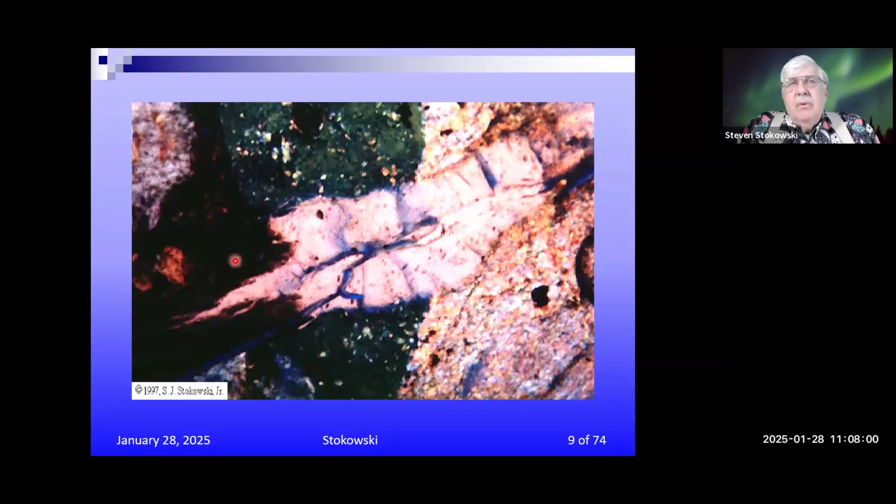But in this case, this rock on the right side here, this is about 1.2 millimeters across, and this metasiltstone here has reacted. It's expelled silica gel, which has gone into the cement paste and reacted here with other components of the concrete on the left. This is what you typically see in thin section work in concrete.

And to be able to distinguish the cracks readily from the infills of the cracks, all of which are various shades of gray, you need to change the epoxy so that the epoxy is blue dyed, and you fill the voids. Now I typically have two different scales that I'm taking photomicrographs in, and these are old photomicrographs before I had a scale bar that you could put in there. But this particular one is about 3.4 millimeters across, and the close-ups are about 1.4,

1.2. And here, this aggregate particle has expanded and cracked, and there's silica gel that's come out of it, and continued expansion, which left void space in it. It actually shot silica gel out into an air void in the concrete and completely filled that void, and then continued to expand afterwards, reopening this crack, which was then filled with epoxy so that we could get a good thin section.

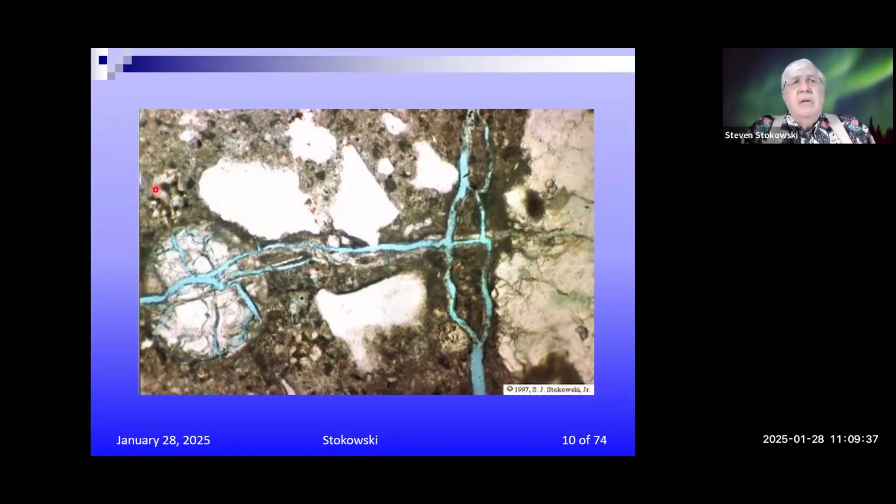For those who don't know, these are cement particles right here, and they're composed primarily of two minerals: this, which is belite, which is C2S, and ferrite, which is an iron aluminum silicate in here. There's also another mineral which imparts most of the strength in concrete.

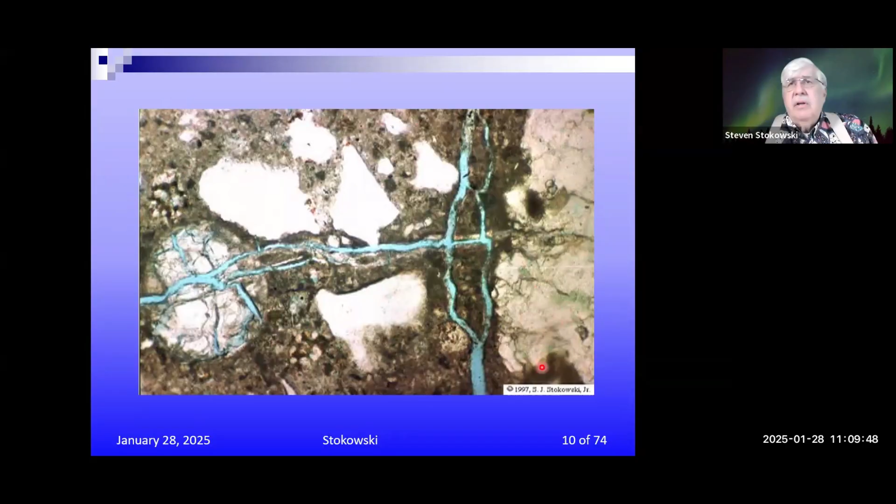Now, in concrete in New England, you have ASR that occurs. It doesn't occur immediately, which is distinctive from other parts of the country. You generally have to wait at least 25 years before there's any expansion. And sometimes things are just only starting 90 years later. And the reason for this is because of different environments that the concrete's in, particularly if they're wet, you get a lot more alkali silica reactivity.

If you're dry, and that means the internal relative humidity is less than 80%, you get no reaction. But if you have a change in use, adaptive reuse afterwards, you can then cause this concrete to be wetted, and you can have a reaction going on. In addition, the classification for this is different than in other areas, in that this is the late slow silica silicate category. And this is occurring with a large variety of rock types.

In New England, essentially everything is a metamorphic rock or an igneous rock, but it's usually metasomatized too. And so you have a lot of residual strain in the rock and alteration. And some of the classifications are vague then because you have feldspars in there that are altered to mica. So if you were to try to classify these rocks strictly, you're coming up with a different classification.

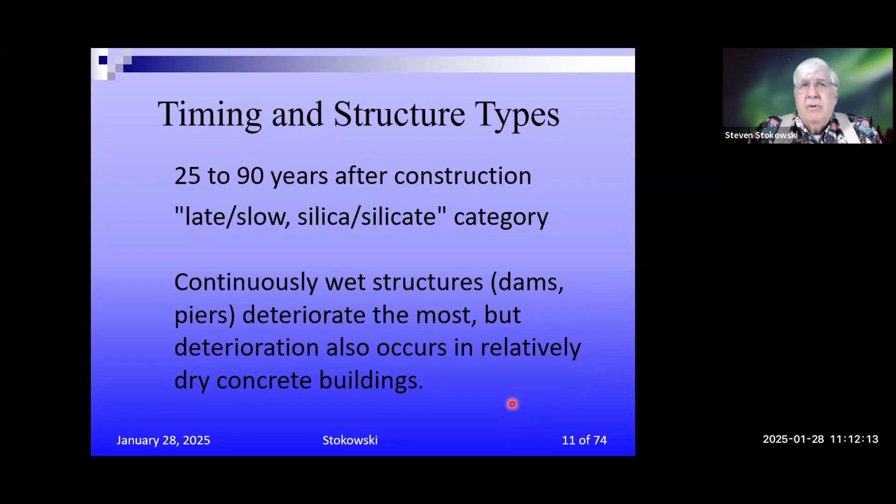What happens with the timing of the micro effects? I showed you some aggregate rim clarification. That's usually the first thing that happens. Then you can get paste saturation, the saturation of the relatively porous cement paste and filling of air voids. You can also get radial cracking and splitting of aggregate progressing into the paste and the concrete as a whole.

So you can have expansion that goes through the cement paste around an aggregate particle and then cracking other aggregate particles that are just restraining the concrete from expansion, but their strength is not something that can resist the infinite expansion of alkali silica reactivity of the aggregate in the concrete.

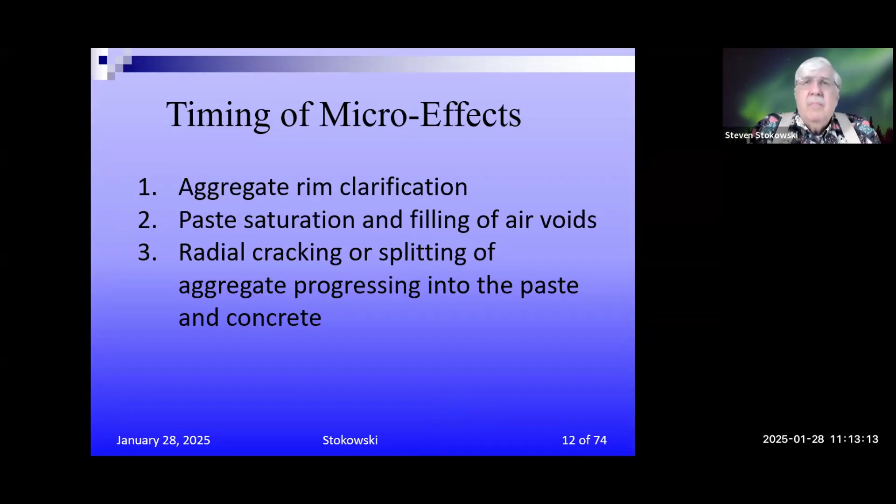Now there's some confusion with classification of aggregate in concrete. There's coarse aggregate and there's fine aggregate. Now the engineers and geologists artificially classify the line between coarse aggregate and fine aggregate as the number 4 sieve. Now that's not 1/4 inch, but when you have material that's coarser than about 3/16 of an inch in sands, fine aggregate, those are often rock particles. They may not be single mineral grains.

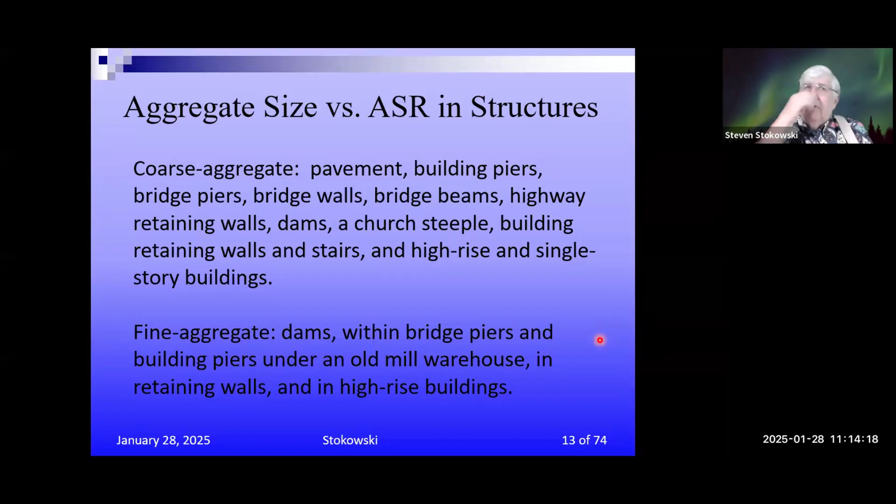So finer than that, you may have single mineral grains that are quartz. And the single quartz grains don't seem to ever react when they're in fine aggregate in concrete. But the single quartz grains may react when they're in coarse aggregate. So they have surrounding sources of other materials. And if you have feldspars in there or residual from feldspars, you get another source of sodium and potassium that can then be part of the chemical reaction and result in sodium and potassium silica gels, which are the ASR product.

But here you can see that just about every kind of structure you can imagine has reacted. Pavement, so this is interstate and U.S. level pavement and commercial pavement, building piers. These are piers that supported mill buildings, bridge piers, bridge walls, bridge beams, retaining walls, et cetera, including some unusual things like a church steeple.

Fine aggregate is similar types of concrete, but you tend to have better control of the aggregate quality for pavement, so you don't really seem to have any ASR in fine aggregate pavements.

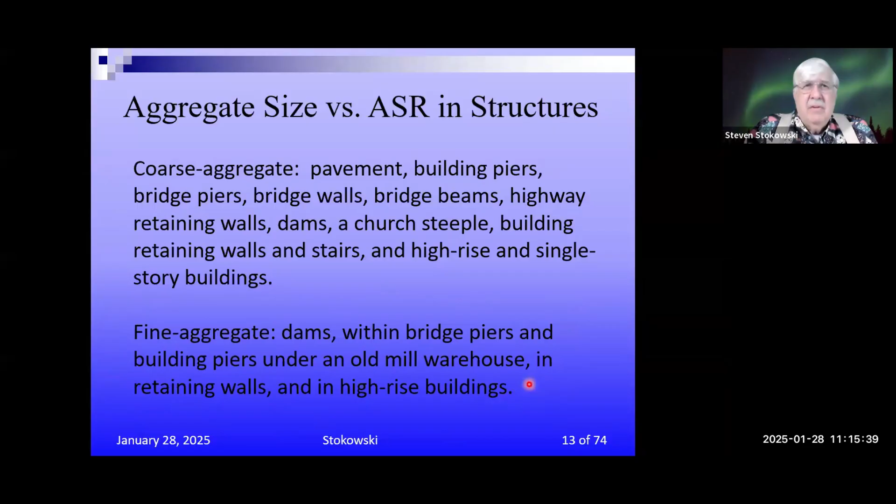There's a lot of older quarries which supplied aggregate to concrete extensively, and these are metatuffs and metarhyolites, and they were very reactive and are very distinctive in appearance and have caused problems. Quartzites are another one.

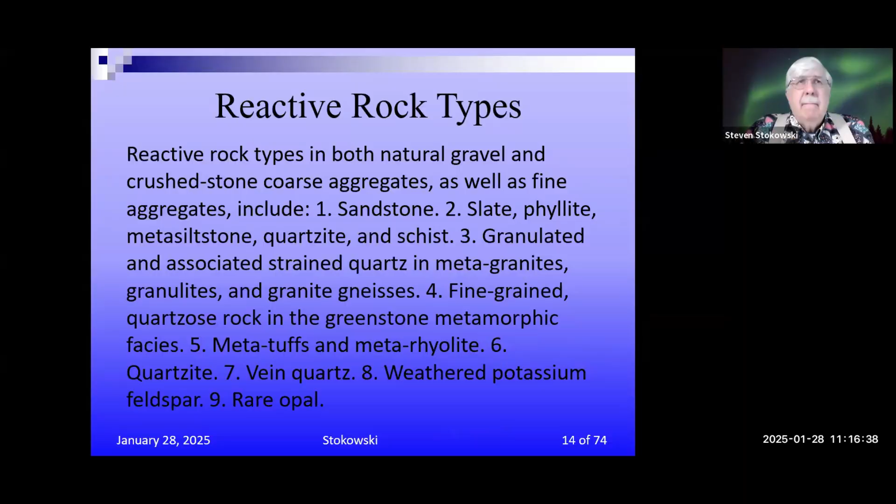One thing about alkali silica reactivity is that in the early stages of deterioration, the concrete actually isn't deteriorating, it's increased strength. And that's because it's put some internal gel into the paste, which increases the density and improves the strength. And that is indistinguishable from the kind of strength that you get nowadays in concrete. But historically, concrete was made and would only really expect to reach 3,000 psi. So you may have 3,000 psi concrete originally as designed and expected, that after 50 years, because of ASR, is now 5,000 psi. But it's beginning to crack up at that time.

And if you have a chance of ingress of water, you can have other deterioration mechanisms that add on to the weathering of this concrete. Particularly in New England, you have a lot of freeze thaw. So you may have concrete at depth that isn't freezing or thawing, but if it's at the surface, you have the whole surface of the concrete deteriorating. And this freeze thaw cracking can be really extensive in large, massive concrete, with essentially rubbleization of the concrete.

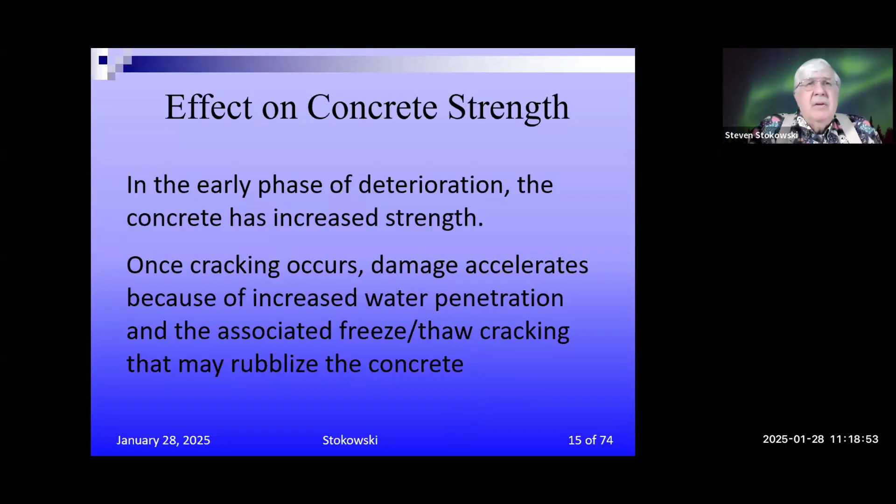And everybody who worked on that during the Civil War was deferred from serving in the Union Army. So that was a cushy job if you weren't that interested in going to the South and possibly meeting a fate that your mother didn't want you to meet.

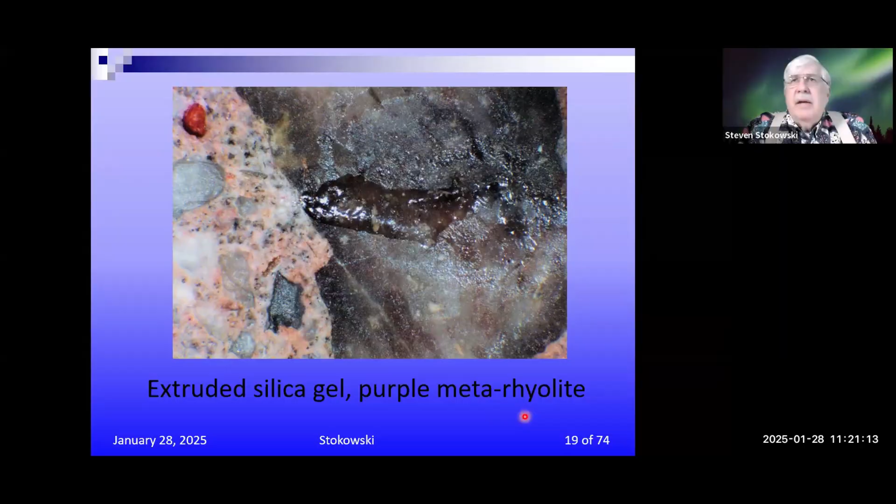But besides having this purple rhyolite, which is a beautiful stone and used for architectural uses, both in concrete and for lawns, if you will, or stone mulch around shrubs. It's mostly a purple aggregate, but some of it is also a yellow aggregate. The yellow material is an area that has some hydrothermal alteration, and it is more reactive than the purple material.

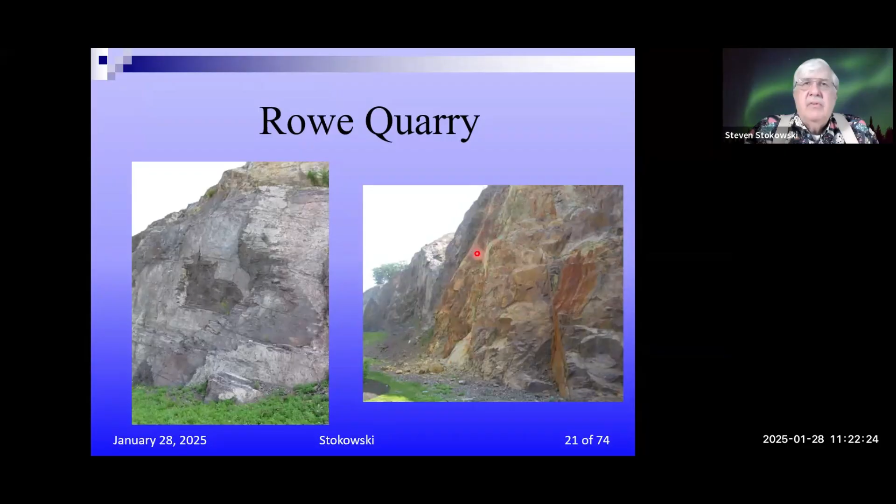Building 54 has pattern cracking on the outside, and it was designed with this purple aggregate in it from the Rowe Quarry, and that's reacting, but mainly just on the outside. As you get to the interior of the concrete work, the relative humidity has decreased, and it doesn't react on the inside because of that. But it's reacting in lower levels where you have high relative humidity in the sub basements and basements and the floors there.

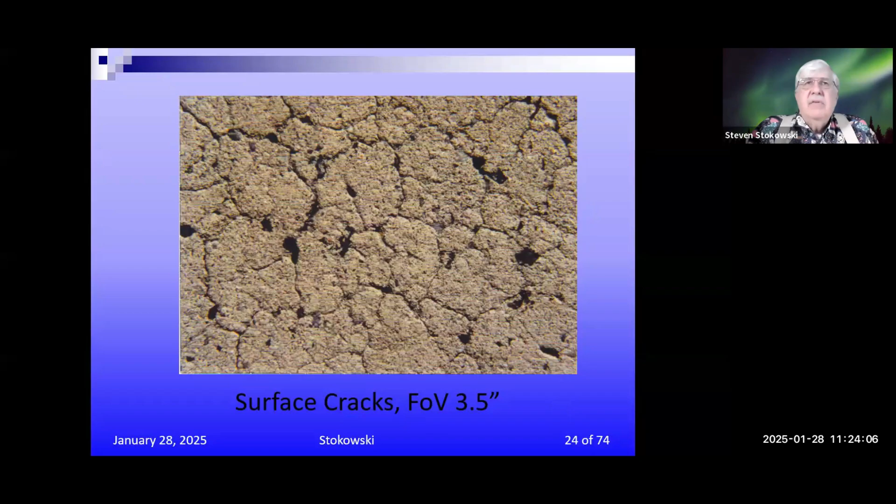The field of view there is 3.5 inches, so you can get an idea of the size of these cracks. And here's the rhyolite, and you can see some of the other mineral particles of xenoliths in there, and it has cracks along it, and these cracks extend out into the paste, and they've got silica gel in some of the cracks, but other cracks are open, and they've got blue dyed epoxy because of my specimen preparation techniques.

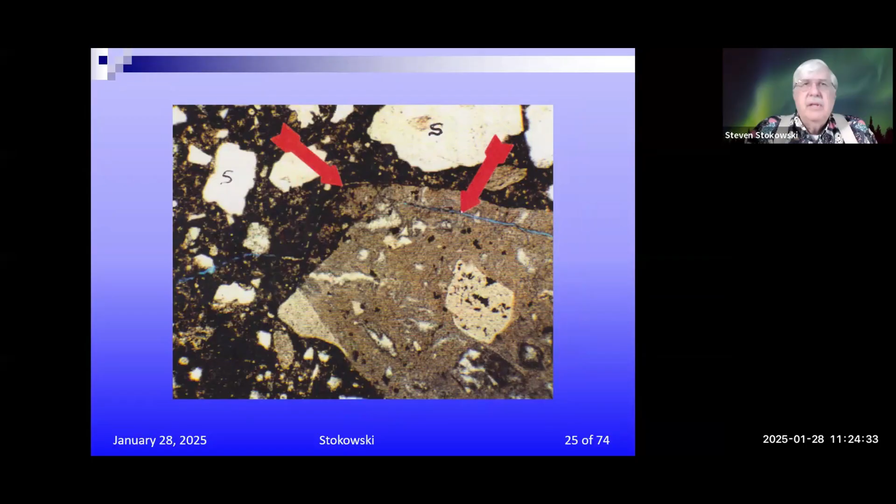Here's another image with this particle, which is overall finer grained than the previous one, but it's got silica gel in it. You can trace this crack, how the silica gel goes out into the cement paste, which is what this is out here. And these are sand grains in this cement paste and the concrete, and this is a coarse aggregate particle with the silica gel crack underneath these arrows.

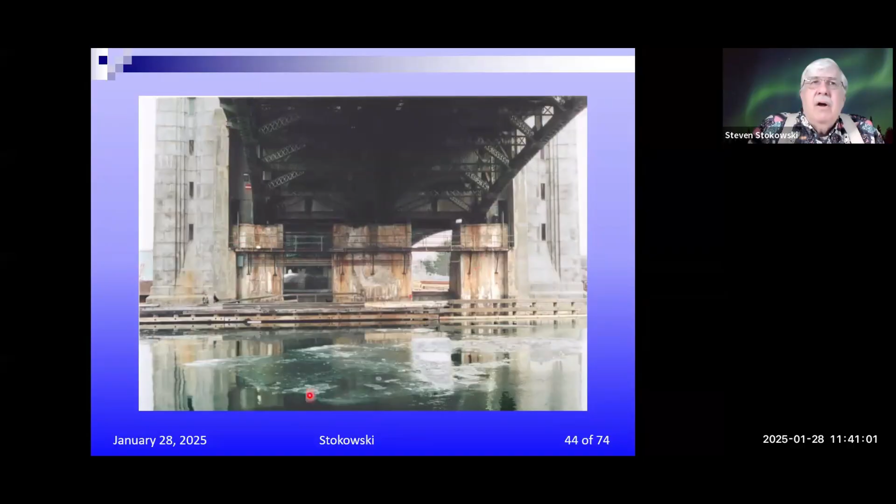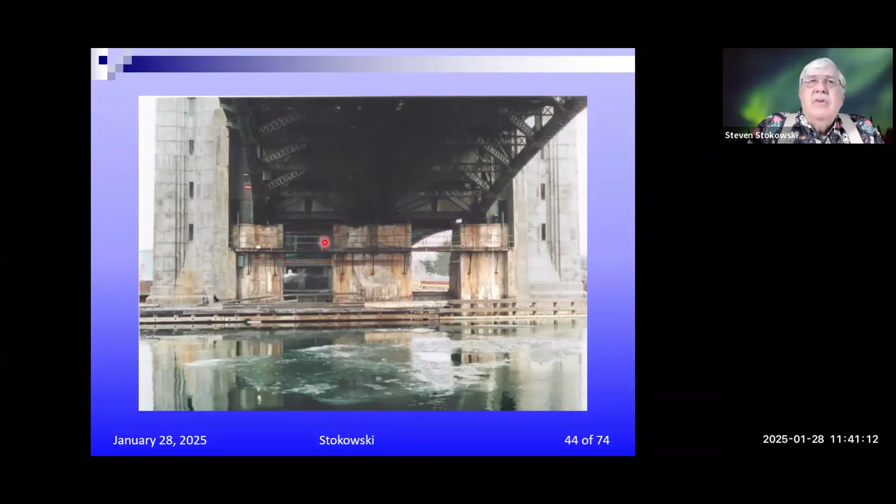Back to the bridge. Now I'm going to point out something right here underneath this bridge. There's a catwalk there, and here's a head-on view of the catwalk, and another bit of ice floating downstream; out to the ocean is to the left here. And you can see there's railings up here. Now, when you go closer in, you can see these railings again. And because it's on seawater and rust, this looks pretty nasty. There you go.

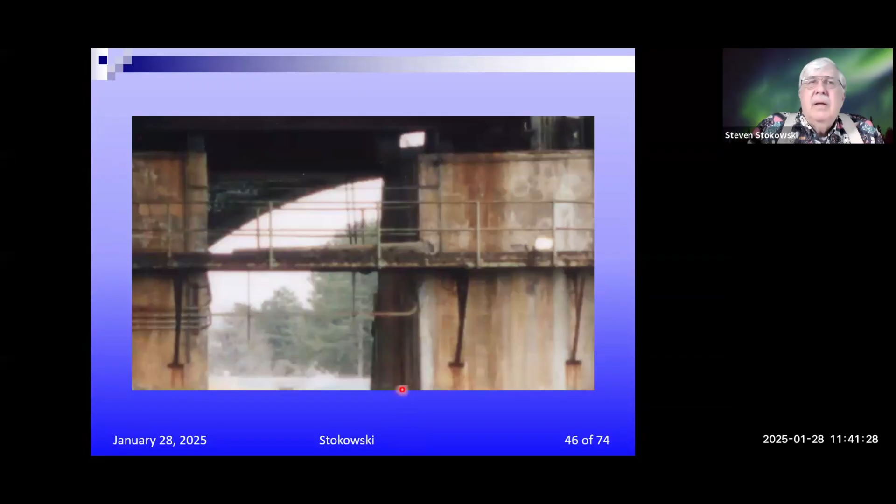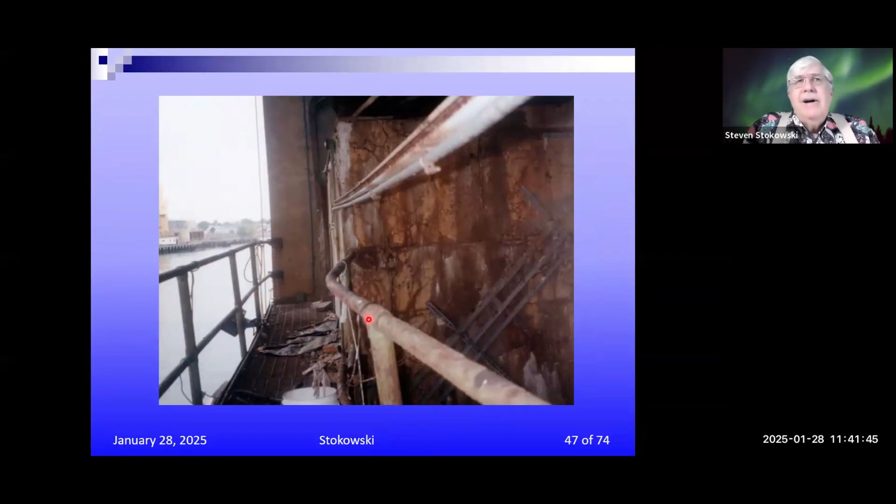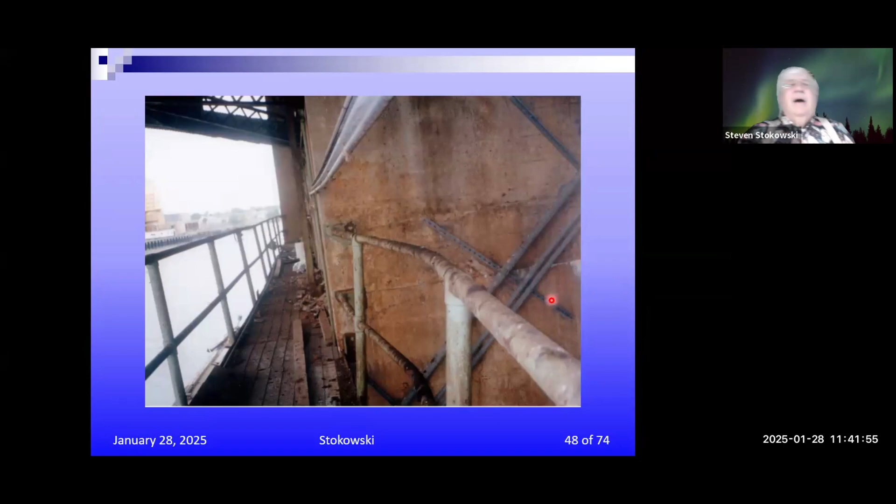When I walked out on this catwalk, I noticed this railing was bent. And I thought, oh, that's pretty interesting. Why did they tie off on this railing and pull it out? And then I went to the next railing, and it's bent the other direction. And they didn't tie off on that. That's inland. Nobody tied off on that. These railings are bent because these piers are expanding.

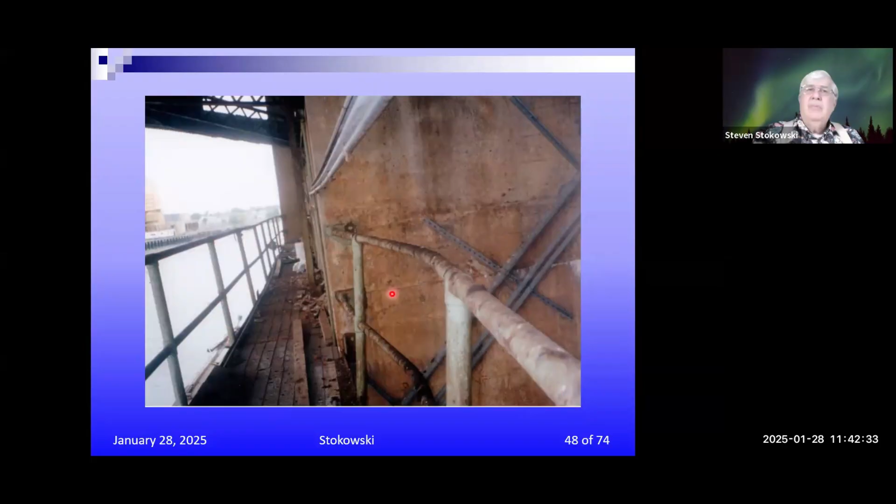And these railings were jam fit in here, custom fit, and they were deforming because of the expansion of the concrete. The outside railing wasn't bent at all because this isn't really affected by the expansion of the concrete. But these are telltale indicators of the expansion because they're in between these piers. Again, that's the area where you can see the bent railings right there.

Now, right up in this area, there's a gear that supports the bridge.

Out here, there's 150 tons of dead pigeons and pigeon guano. But that doesn't do anything as far as this. But it does make people not want to go up here and look at it. But being a good consultant, I went up there just to see what was going on, and I found that out.

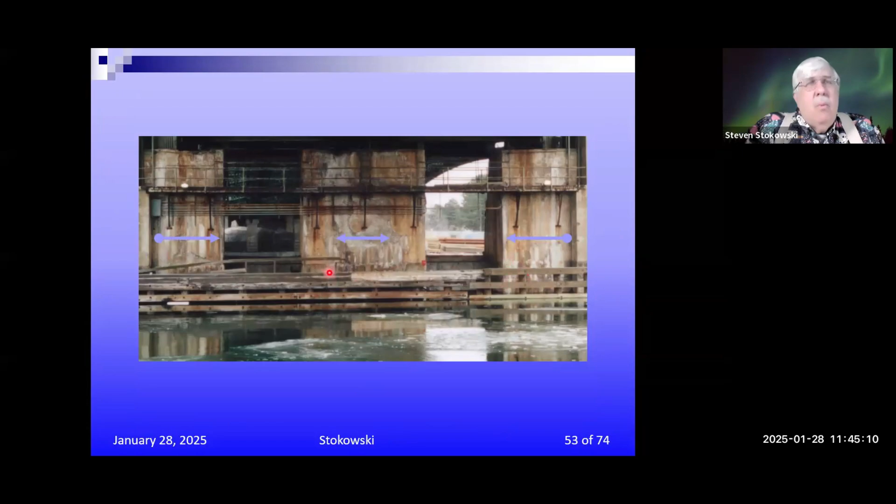We did a lot of work, months and months of work, on this concrete to see why. But here you can see where the concrete was reacting and pushing. Now on the outside here on either side are these piers, and they're essentially immobile. So the center pier is expanding both directions. The outside is expanding both directions, but it's restrained right here. So all the movement goes to the inside, and that's what is forcing these railings to be deformed and the teeth to be sheared on the gearing.

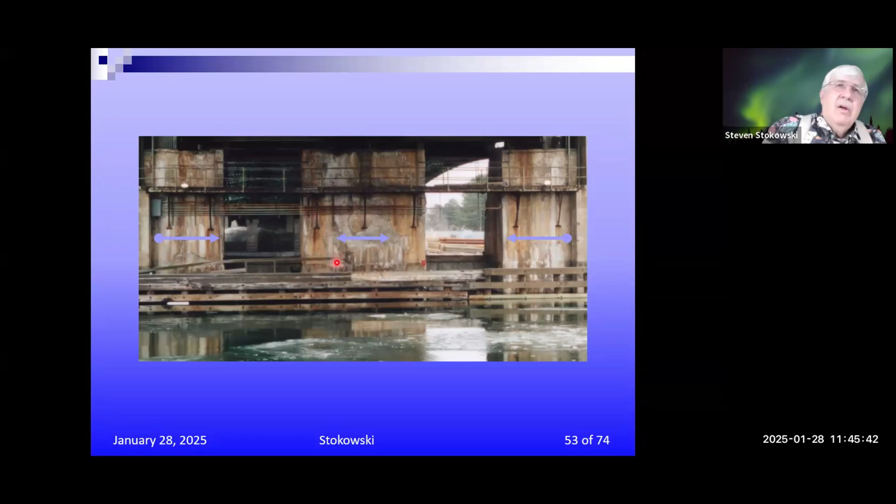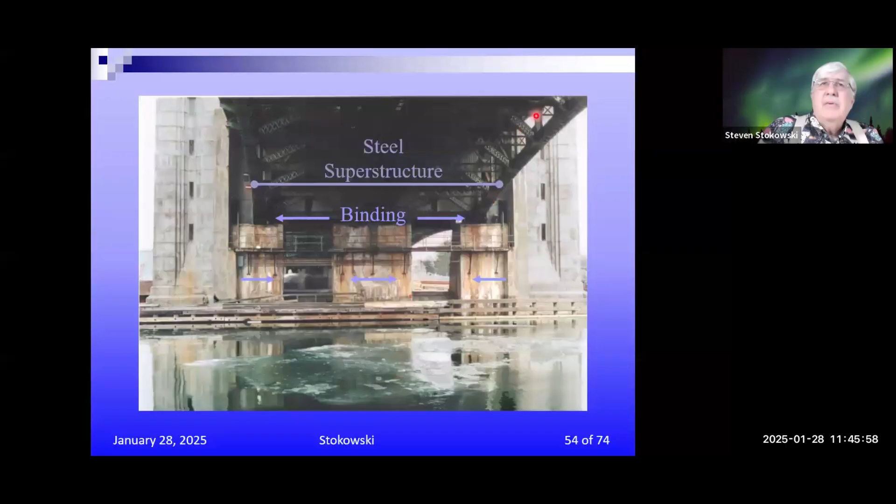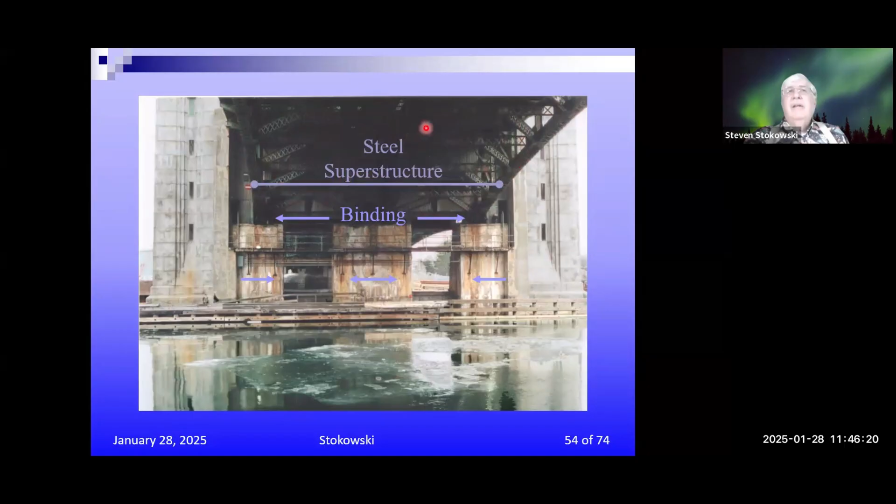And that's where the binding occurred on the inside, because everything moved towards the inside. I calculated out how much allowance they would have allowed for thermal expansion from minus 50 to 160 degrees Fahrenheit up here, and the expansion of the concrete as determined from these railings. It actually exceeds the amount of expansion that you would have designed in for thermal expansion of the steel superstructure.

So we've got a drawbridge that's sticking up in the air, and then you can't get it released and you beat on it. And so we did a lot of work and cored everywhere. 24 cores. These are long cores too, not something that's only a foot long. We're talking stuff that's maybe 25, 30 feet long. 267 feet total coring. Measured the compressive strength, did chloride analyses, and did petrography on a lot of this concrete.

The compressive strength for this bridge was apparently designed to be 2,500 PSI plus. Now that's from the Depression, so they would probably be about 3,500 PSI now. But they've gone up to 6,900 PSI, and that's quite a bit, and more than the original design. Part of that's due to saturation with silica gel, but also, that's just the cores that maintained cohesion. On the average, it's about 4,500 PSI.

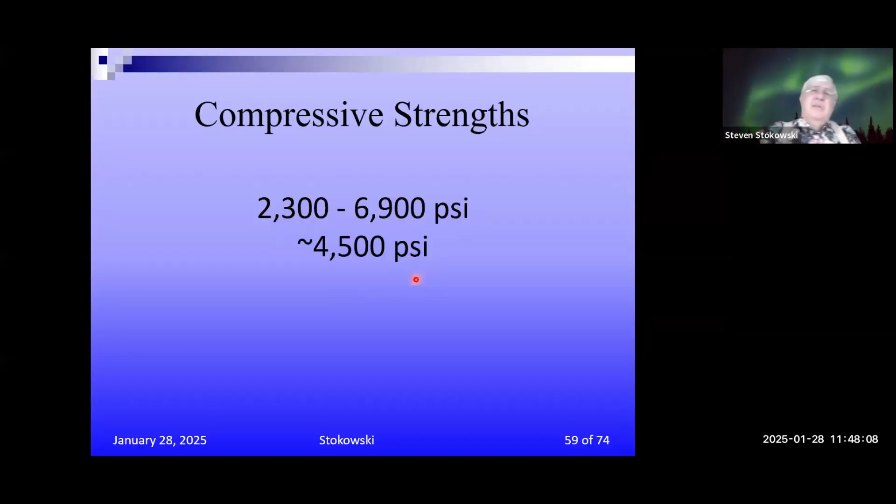But you've got to wave your arms a bit on the interpretation, because we did our best to not have any large aggregate particles in these 4-inch diameter cores, and you're supposed to have particles that are less than 1/3 of the core diameter. We looked on the outside and selected portions with small particles intersected by the core. But in fact, you could core a 4-inch particle and just hit the end of it and not see that. So that affected that. We had to reject that as far as the analysis, but we had everything broken down.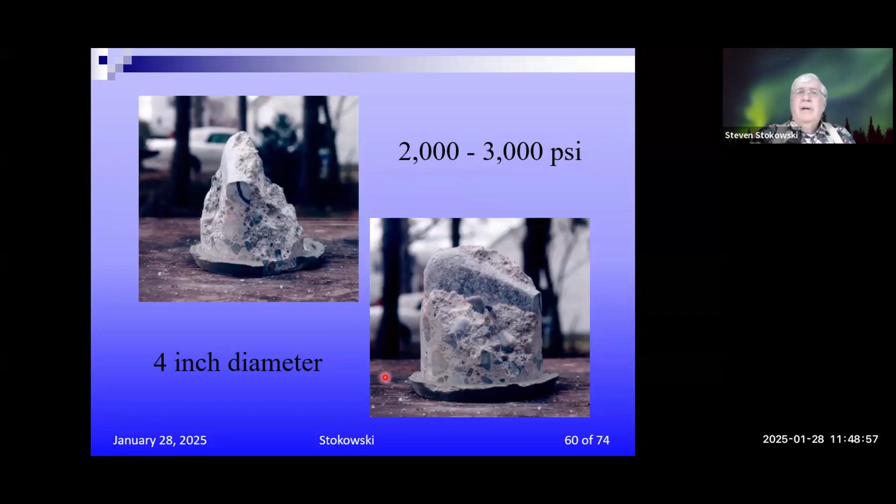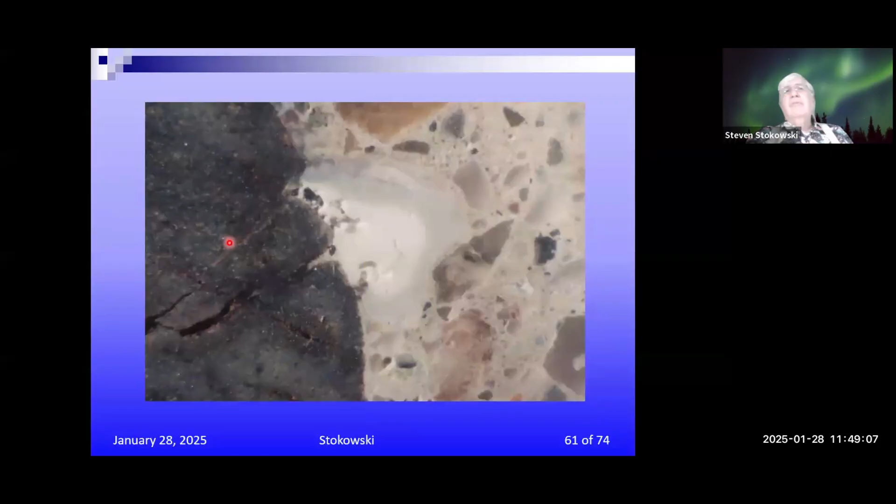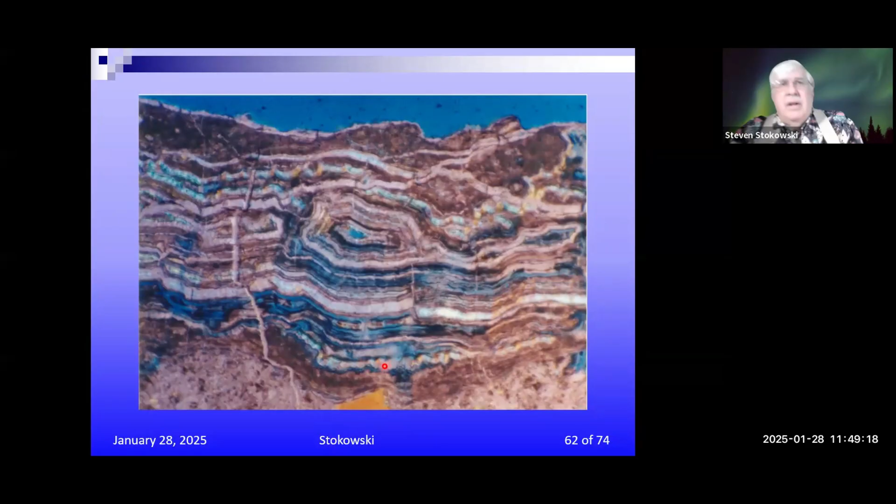But when you start prepping this stuff, you can see silica gel filling voids around the outside of the particles. So it's quite obvious with some thin sections and areas of more silica gel. This reactivity has been going on for an extensive period of time. And look at the multiple layers in this layered silica gel here.

As before, when you get into the concrete, you can see plates of calcium hydroxide and water voids underneath particles. Now this is also a metasiltstone, and you've got unusual sulfate minerals forming there. Here's ettringite in this air void here, and you've got dissolution of the cement paste here, and this is residual cement paste that hasn't been dissolved yet.

Here's a coarse aggregate particle. That's a metasiltstone. It has saturated paste on the outside. Below the saturated paste, it's got peripheral cracking here, which is this crack that's filled with blue dyed epoxy. And the water void underneath of this one is completely filled with silica gel.

But because we've also had some seawater entry into this, as it is below the water level, you get dissolution of cement paste with residual portions of cement paste here. And the blue dyed epoxy here is saturating the cement paste, which has been dissolved, and that's why you see a paler blue color, but you see some of the cement particles that did not react with the sulfate solution from seawater in there that are still present, plus probably some fine particles from the sand and coarse aggregate, which were in the cement paste.

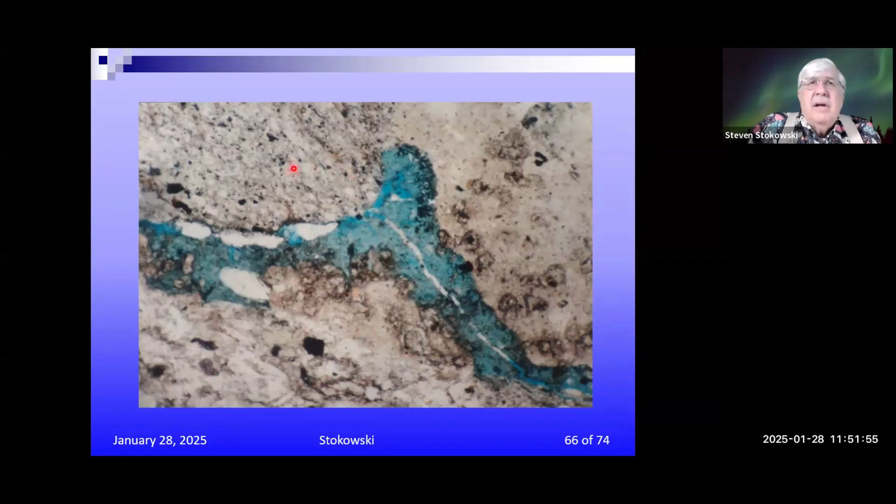Here's another example of dissolved cement paste along a crack, which has got silica gel on the outside of the crack, which apparently was split in half, and later silica gel, which went down the center of the crack. But it's hard to tell the sequence here. These are cement particles, and this cement paste out here is very saturated with silica gel. There's another water void filled with silica gel underneath, and coarse aggregate metasiltstone particle here.

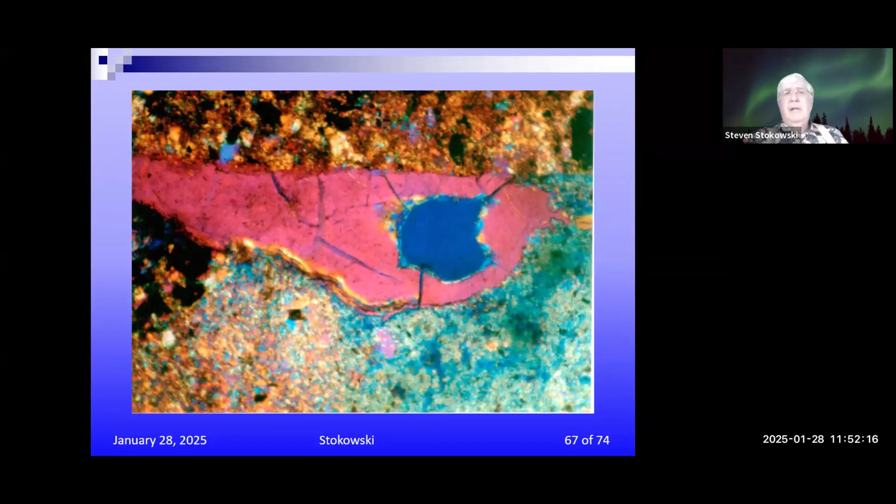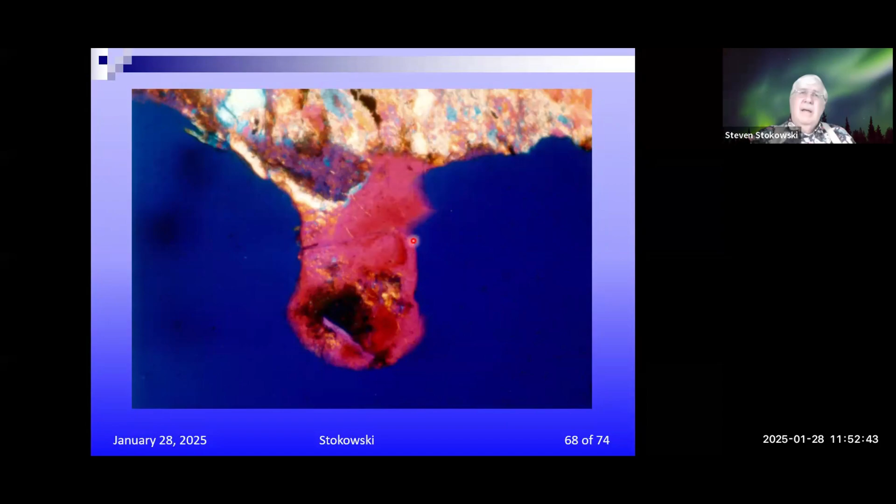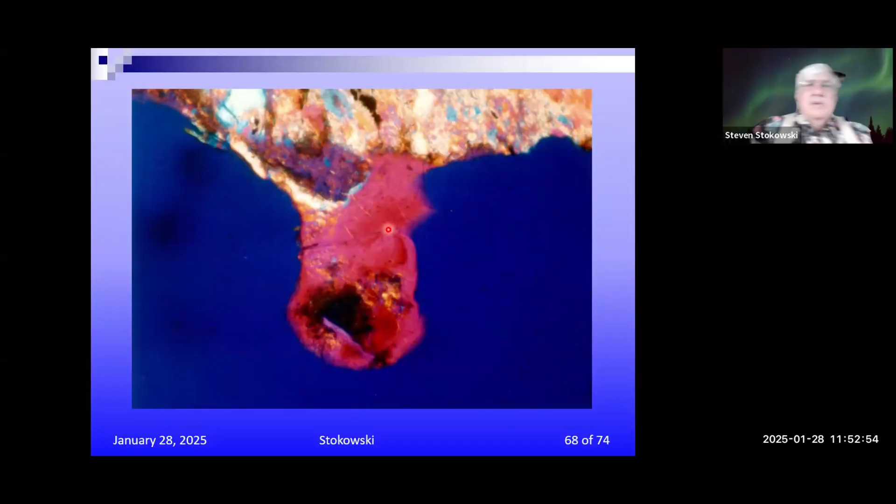And here's a geopetal structure. This was above the water level, and the silica gel was dripping out of this coarse aggregate particle and then forming a little stalactite. That's a geopetal structure, and one of only a couple that I've ever seen, which indicate on the structure itself which way is up. And this would be all just gray with blue dyed epoxy here. But because of the way I adjusted the optics, it has this nice pink pastel color to it.

Here's another case of water void underneath a coarse aggregate particle and a siltstone. And here there's silica gel mixed with ettringite in there, which is giving it this fibrous type appearance, and over here plus and higher birefringence.

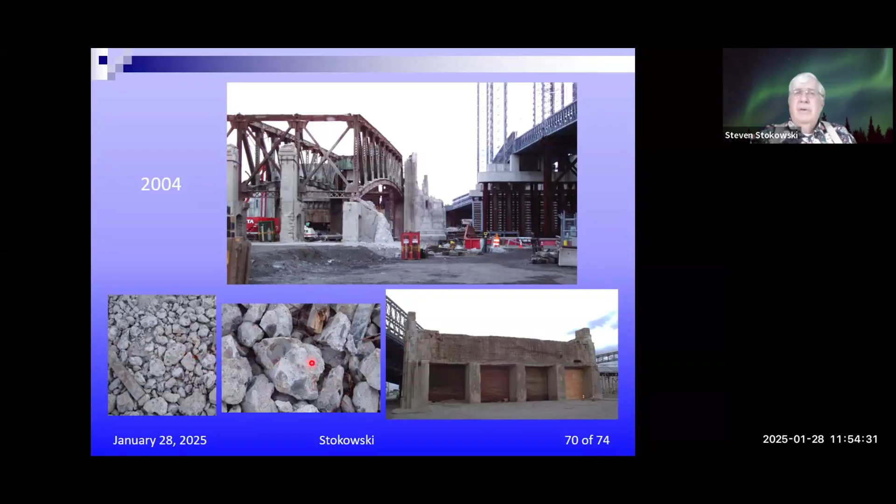Now, the concrete here disintegrated easily underneath of it. So in areas here where these abutments are, they weren't even crushed. They were just broken up into small pieces with heavy machinery, some with drop balls and some not at all. And this concrete was not reused at all. But here's the first bridge that was built. They built a whole new bridge so you could build the major bridge that you wanted afterwards. So they built this over a course of a couple of years. This is a temporary bridge. Major commuter route. So this substructure here is not galvanized, but everything up top here is galvanized because they didn't want to have any problems with it.

And this, by the way, is the Salem, which is the display ship now, which is a World War II cruiser. Salem is 40 or so miles away from here, but this is the best place to dock this ship. And it's right down from the historic Fore River Shipyard in Quincy.